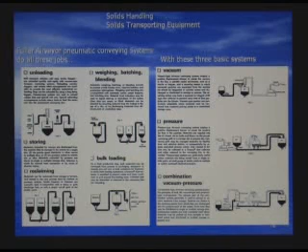The biggest enemy comes in, because when you straight away dump material into your silo, there's a lot of dust. So we have to capture that dust, be sure that we capture it and take it away from the main area, and treat it later on so that it doesn't go into the environment and become an environmental hazard.

This is called a vacuum system, because your motive power is here behind you, so the whole system is under vacuum. That's why it's called a vacuum system.

Then we have a pressure system here, where the motive power is here, so you pressurize it and then take it to your silo or storage area. This is your culprit here, the dust collection, and then it gets out to the environment.

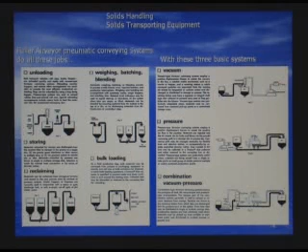And this is a combination of the two above, which is also used. This part is the vacuum side, and this is the pressure side. So you can see both of them are working in conjunction with each other.

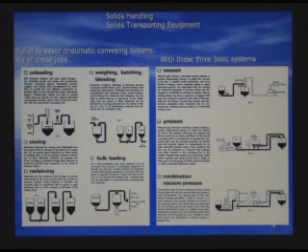What we can do with it: we can unload, like if you have a barge, railroad car, or a truck, you come out, separate your dust from here, get it into your storage, and go into your process area, and start doing the process work.

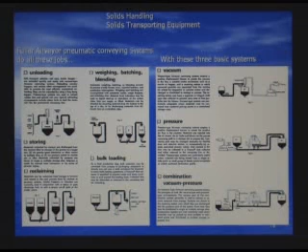We can store it, which you saw here, that it can store. We can reclaim - once you have stored equipment and stored material and want to take it into the process, you take it out from here and go into your process streams.

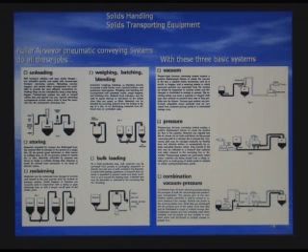We got bulk loading, where you are loading - this is our product, like fertilizer, or polyethylene, polypropylene, all those petrochemical jobs, which we did at Pasadena.

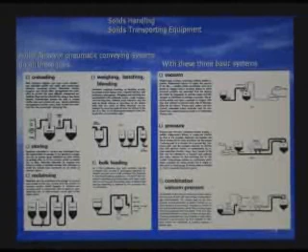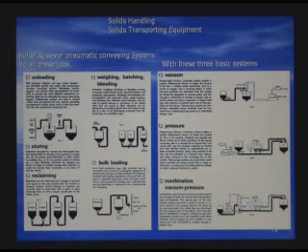I don't know whether somebody was there a couple of years ago, but we did a very big job for polyethylene and polypropylene. So we get involved with all this handling system, and when your product is out, this bulk loading means your product has to be loaded into a railroad car, a barge, a ship, or a truck. So all those systems you see here with pneumatic can be done by vacuum, pressure, or a combination of the two systems.

And that's the way the pneumatic system works. I'll give you some very practical examples. These are the old slides I was talking about, so bear with me for a little while.

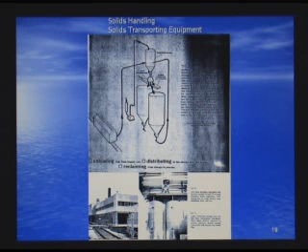Now, we can also pick up from here and bring it back, and also go into the process stream here by using this vacuum system, because this is your motive power here.

This gives you an example of what an actual plant will look like. You can see these huge silos here, and this part is your triple diverter or distributor - it goes three different ways. So this system was exactly for this plant, which was built by one of our ex-companies.

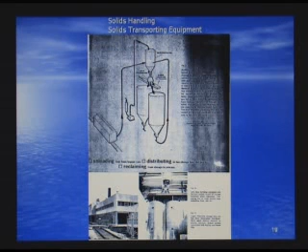This is another system which I'll go through quickly and get it over with. Here we are showing the number of ways you can split, because the pneumatic system is very flexible - you can move it so many different ways, and it works.

This is your starting point, where you got your material and then split it. And this is an actual plant which was built on this basis - you can see the plant, how all this storage is arranged.

Now here's an interesting point which I made before, that everything first you go up and then use your gravity. See all these chutes which are using gravity - there's no power required. It just goes down into your silos, and then it goes down further into process. Everywhere we use our friend gravity all the time.

This is one more - I just don't want to go too much into it, but it gives you another configuration of how we put it all together and how it all comes together.

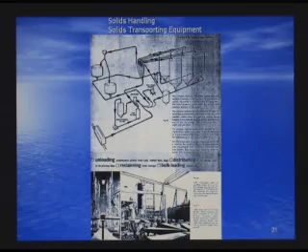Now we come to the solid transport equipment. These are the conveyors, and many of you have seen a conveyor somewhere. But the most important, most used conveyor is the belt conveyor, which is a simple, endless belt, and you have the material going through that conveyor. You have the motors, the conveyors, and all the structural steel there.

The other type of conveyor you might see in a powder plant or a catalyst plant would be a screw conveyor, which handles more of a powder, because this is a screw which brings material from A to B and dumps it down to the next process equipment.

Then there's another conveyor we use quite a bit, the vibrating conveyor, which vibrates and pushes the material from there to there to there to the discharge.

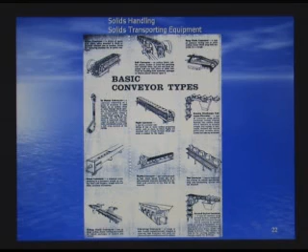And there is a fourth kind which you might see, maybe if somebody has seen a brewery or a packaging plant, where you have this conveyor here, where you can see the boxes being conveyed and going into storage and, of course, going off to the market. Okay, that tells us something more about the conveyors.

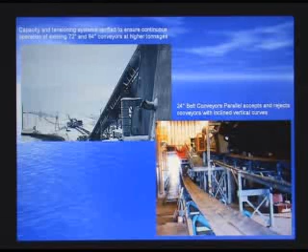One thing very interesting about material handling: when you design a conveyor, there's a lot of real estate required, because unlike piping in a refinery, where a pipe can go this way, that way, there, or there, when it comes to material handling, you go just straight. You can't turn. The only time you can turn is if you take the material out of that conveyor and dump it into a second conveyor going in a different direction. If this conveyor is going that way and you want to go another way, you come out here, drop it here, and then go that way again. So there's a lot of real estate and planning by piping before they can put a conveyor together.

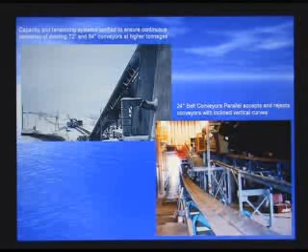Another interesting thing here: you can see it's an endless belt, and it has a concave curve and a convex curve here. You can see there's a convex section. So it is very flexible as far as where you can go and how you can go. This gives you a good example of how it can go through miles and miles, and you can design a system for this. It's more used in minerals and mining areas.

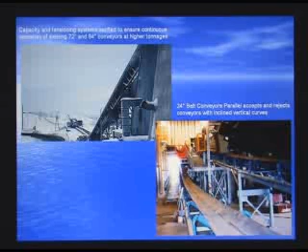This one here, I wanted to show you something more about how it is supported. You can see there's a conveyor there, and you need support, so the structural people get involved with us. We've got a walkway, there's all structure. We get OSHA involved because these walkways are all OSHA requirements.

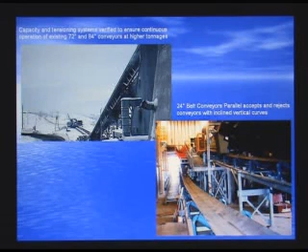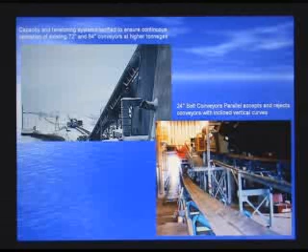We have the belt here, and then we have the drives, and of course the electrical people and the controls people, because a material handling system, when you start it, there has to be interlocks. You start this conveyor here, a second conveyor here, and a third here. If this conveyor is leading and you stop that conveyor, you better stop all the conveyors before it right away, because otherwise you're going to get a huge amount of material on the ground and a lot of dust and an environmental hazard right away. So it's all interlocks—a lot of controls and instrument people get involved with material handling.

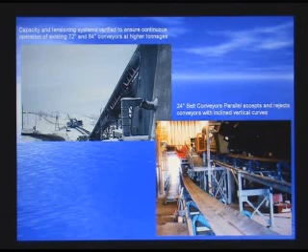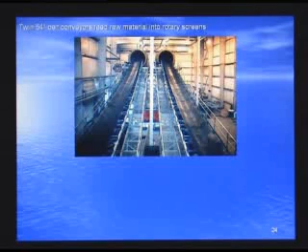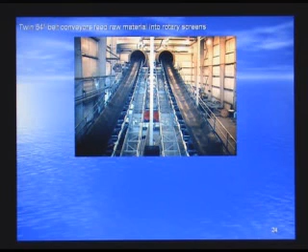This one, I wanted to show you something interesting here, that you could go into a tunnel. This is for rotary screens, but it's a similar situation where you go through tunnels. You might see conveyors going through big tunnels across the land—it could be going for miles, and if there's a big mountain, you don't want to go up and spend so much money on power, so you go through tunnels. You can go through just like a rail car, trucks, or cars—our cars go through the same way the conveyors go through the same thing.

The next thing in transport equipment is feeders. These are short conveyors, similar to what we saw before. There's the belt feeder, the vibrating feeder, and the screw feeder. They are smaller, feeding material in a nice rhythmic way into your systems.

Then we have elevators, which we talked about a little. This is where in a plant you want to go up but don't have room. A conveyor goes straight, but you can't reach where you need to. So you use elevators to get there.

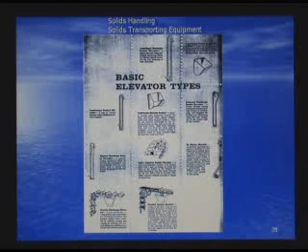There are a number of types of elevators. This most common one uses centrifugal force and just dumps material from here upstairs. There are other kinds too - this is more of a gravity type, and this is a pivoting type where you pivot the buckets. These are all buckets, and there's a continuous version, a chain that runs up and down all the way. That gives you the idea of those conveyors.

Now we come to solid storage equipment. I told you before that storage becomes one of the big issues in material handling, because you have to handle a lot of bulk, a huge amount of storage.

These angles are very important in material handling design, depending on the angle of repose which we talked about earlier. That angle of repose is the natural angle of any material - drop some powder, sugar, or salt at home, and you'll see that angle is different for each one. That's a very important factor, and it becomes very critical for us to design any system.

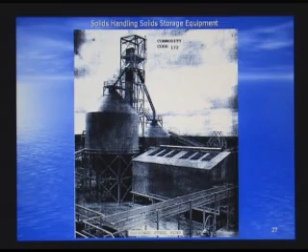This gives some of the different supports we use - your friends from vessels would recognize this well. There are different kinds of supports we provide for the silos, as you can see here, here, or there. All different kinds of supports depending on the design, how much space we have, and what kind of center of gravity we have.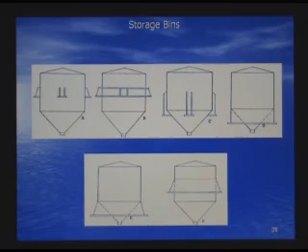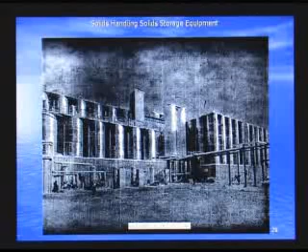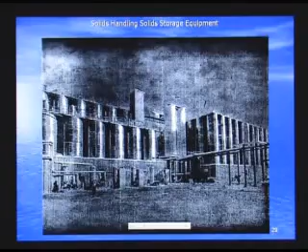This is being done today as we speak - we're going to use the same concept for our North American job, the sulfur recovery job here, for the North American oil sands group. We're going to be forming sulfur into solids and using concrete silos. This is an existing plant for Shell - these are giant silos made of concrete. So this is a third way we can build the silos.

This also gives you the flavor of how many different things we can do with material handling, how wide it goes - it can just go on and on and on.

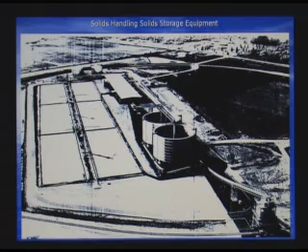This also gives you some idea of the conveyors - you can see the conveyors here, dropping material and filling the rail car, with a railway track here. There are also side conveyors for reclaim. This is the plant making solid sulfur: it comes up on a conveyor and dumps into the silo, where we store it until the railway train is available. We have to store a huge amount of sulfur, so we have to build huge sulfur storage areas.

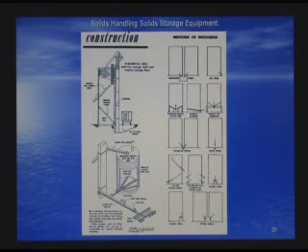Okay, this gives you some idea of how we reclaim from big, giant silos we have. And there are so many different ways of reclaiming your solids back.

Sometimes the other reason is if you are near a town, a city municipality, or where environmentalists won't allow you to dump any solids outside, you have to cover it completely. The third part is of course the weather. You might be in Canada, or in the northern part of the country, with a lot of rain and snow, and you can't keep your material outside, so we go indoors.

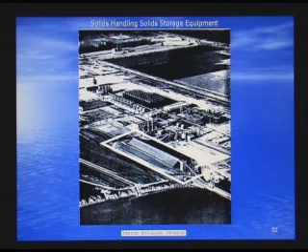So this is an inside building storage. We have huge buildings. You can see the plant versus the storage area is a huge amount we need.

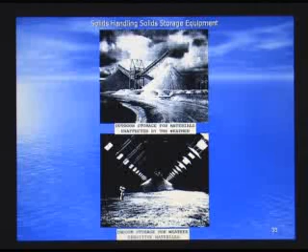The interesting part about this, you can see here, this is the angle of repose of this material, and this is the angle of repose of that material. Angle of repose is the natural angle which happens when you drop material naturally by gravity, relative to the horizontal. You can see this material has a different angle than this one - this is a little steeper, and that's the characteristic of that material. So anytime you're handling solids, you have to worry about the natural angle of repose of that particular material.

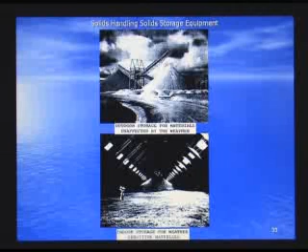This next picture gives you the inside view of the one we saw earlier. This is the inside storage. What happens is you go to the conveyor all the way up there, drop your material, and fill your storage. Then you reclaim it with front-end loaders, and go out for shipment or wherever you want to go next.

Okay, this gives a general picture of our friends in controls. People aren't here, but I kept it for them because I wanted to show how many controls we have in a material handling system. We have controllers everywhere - everywhere you see these signs, they are controllers.

We have a screw conveyor, which we talked about. We've got a bucket elevator here. We talked about silo storage, we've got another silo here, and another conveyor, another belt conveyor. Everywhere you see these signs, they are all instruments. There are so many control instruments given some detail here, but they are involved. So we work very closely with controls people to put the right instruments and right controls there.

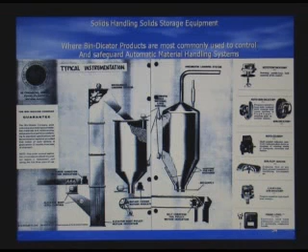By the way, you can ask me questions anytime. Don't worry, I want to make it very informal. So if you ask questions, don't worry - we'll go faster later, so it doesn't bother me.

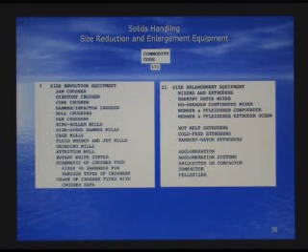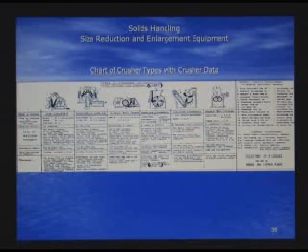Okay, this is size reduction, mostly used for mining and all that - I'll go quick on this one. We don't use too much of it, but these are for mining. We've got different kinds of crushers. We have big, huge mining rocks and we crush them, and there's another kind of crusher and a third kind of form. They're all different kinds for different material, and there's a selection guide here so we can pick what industry we're working with.

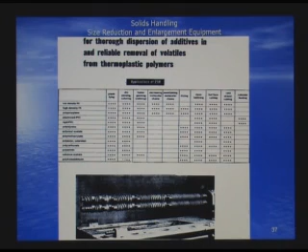This is an interesting one because we will eventually have this, and you might get involved with it. This is an extruder. After we finish refining petrochemicals and go into petrochem plants, we might get projects like this one we did at Pasadena. The extruder has an interesting screw that extrudes petrochemical crystals, going from the liquid side to the solid side using double screws that rotate and squeeze it like spaghetti, then cut it at the end into the little product used for shipping, for plastic bags, polyethylene, polypropylene, all kinds of bags. This plant we designed at Pasadena was for Saudi Arabia.

This shows the extruder in more detail. You can see the size of it, which gives you an idea of how big they become—this is just one machine. Everything is automated; you don't do anything, it's all automatic.

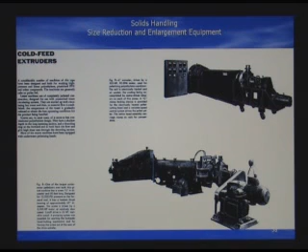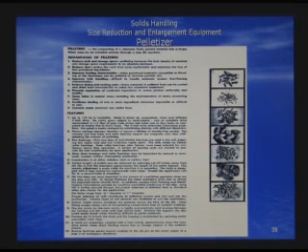This is a pelletizer. Pelletizing happens when we have powders that become harder and harder—powders are hard because we get dust. So we pelletize to firm it up again, enlarging it so instead of powder we make it bigger and can handle it better. There are many advantages of pelleting, and this gives some examples, though I won't go too much into it since we're running out of time.

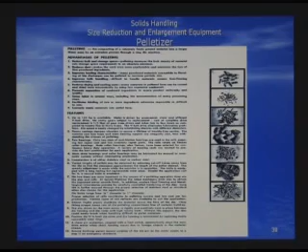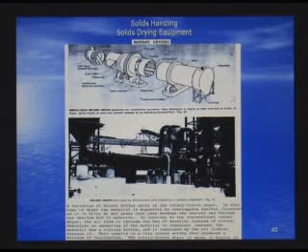This is a dryer. Material enters here, hot gas is applied, and it dries. By the time it comes out, you have the dry product, and the gases exit here. This is an actual plant showing the dryer, and this is where we arrest the dust so it doesn't pollute the environment.

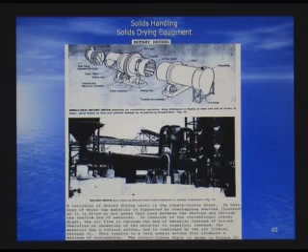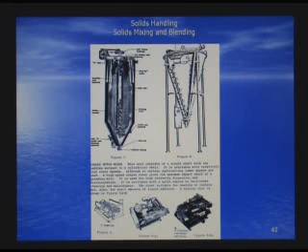This is another setup where you mix products using this screw, which takes it up and down, mixing the product. Same way here with the screw conveyor—it mixes the powders, and these are some other arrangements for mixing.

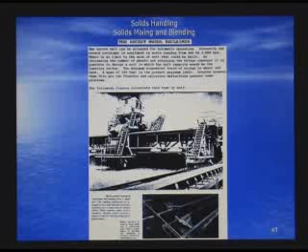This is another blender—if you look at this slide, we have coal and coke. We're involved with coke; if we get coke shipped to a plant for power generation, we get it from different strata, different mines or refineries. Then you blend it by first stacking it up and cutting a cross-section through, so you get a homogeneous product to go into the power plant.

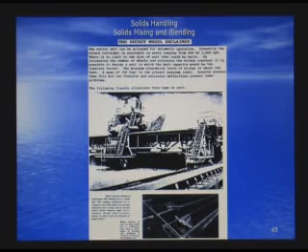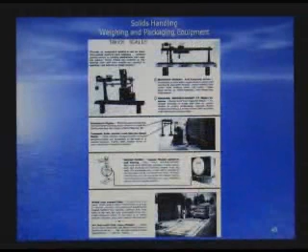This is weighing and packaging. We talked about it, but here's a quick review. We've got all kinds of scales we have to use—this is the truck scale, you can see the big truck, and these are the platform scales.

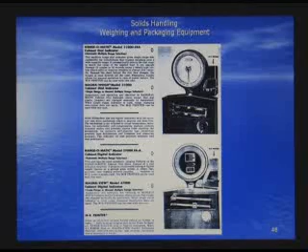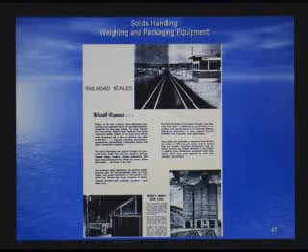Here's another view of the different scales we use—this one is a railroad scale. You can see the giant silos where product is stored, and trucks come underneath to be weighed before going out, and your money comes from that weighing. Once you weigh it, you know how much you've shipped—otherwise you won't know how much to charge the client. So weighing becomes the last part of the project, where we want to be sure we have the right weighing system to give the client the right amount of product, since that's where our money comes from.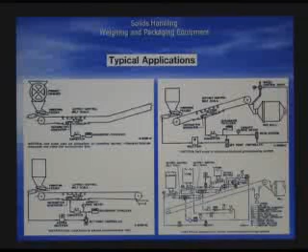There's a weigh scale, which weighs your product while it's moving on a conveyor. We can convert it, we have a tachometer, we integrate it, we can totalize it, we can do all kinds of configurations. This is an interesting one where we blend different products, but you have to weigh it to be sure you get the right blend of final product going into the market. Here we're showing a mill, but you could be going to market.

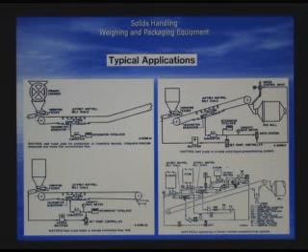Here is an interesting one where there's solids and liquid coming in, and you have to proportion whatever product you're making. You have to get this integrated into one system where you have these belt scales coming in.

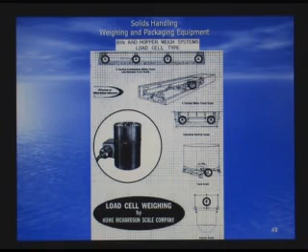This gives you some of the load cells which we use in our different weighing platforms. This is the weighing system which gives you the total picture of weighing, where the product comes in and you fill the bags.

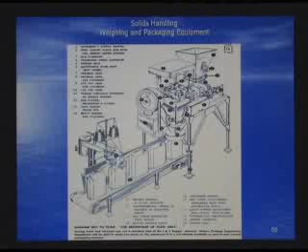You could be using pelletizing, polyethylene, polyester, polypropylene, fertilizer, sulfur, whatever you're selling to the market. You just bag them and sew them, and this is ready to go to market. But this has a whole system, so you can see we buy the whole system. There's every kind of thing - we've got motors involved, controls involved, silos involved, and all kinds of stuff.

This is a separation part, which is a cyclone. I think many process people know about cyclones. This is where you separate by centrifugal force - you bring the heavy slurry here, and the light slurry goes that way.

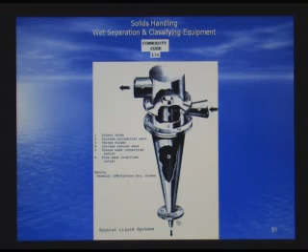This is our friend which helps us combat environmental problems - a dust collector. We get the dust here, fully loaded with dust, and we collect it in bags and get the product out. The dust is collected, and the clean air goes out. So this is our big friend, the dust collector.

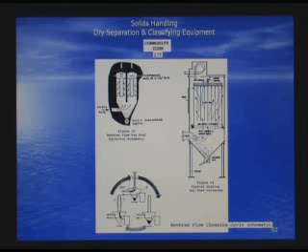You see in many places, every time you have to handle dust, you have a bag filter which helps you. This is another view of the filter and how you clean those bags. I don't want to go into too much detail because I don't want to make you material handling engineers, but you have to backflow the air to clean these bags.

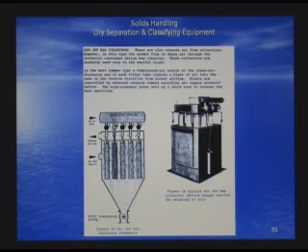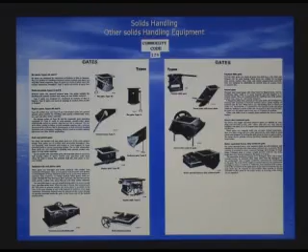These are other things we use in material handling - the gates. You might have heard that gates are there, and we have all different kinds of gates we use. These are the diverters we use when you want to divert the flow one way or the other, or if you want to bifurcate into two streams - you use all those types of equipment.

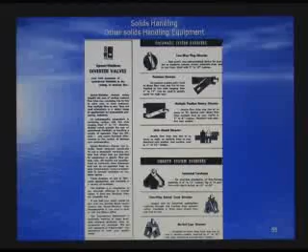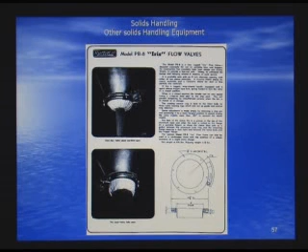There's another diverter, another design, but it's a very precision type. This is a valve, an iris valve - just like your camera, this is your iris valve. When you go into an operating plant and want to control the flow of solids, here you can see it is very trickling, small flow. This is big flow - that's where they use the iris valve, so you can control the flow.

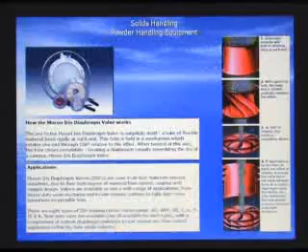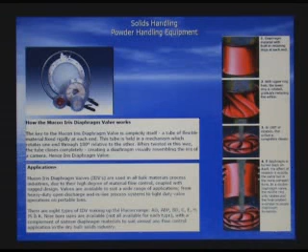This is an iris valve, the way it looks, and these are the different components. This is the way it works - you can see the material is here. There's a fixed ring, another fixed ring, and here we have a flexible material which could be cloth, fabric, or plastic, and then it flows down.

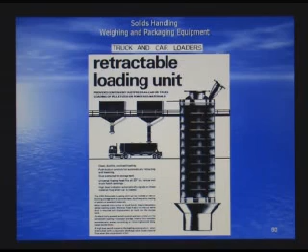And this ends our part - I think we caught up with the time. The next segment I might make very small, so don't worry. We have almost covered three-quarters of the job, so we are done. Next, after a small break maybe, I don't know.